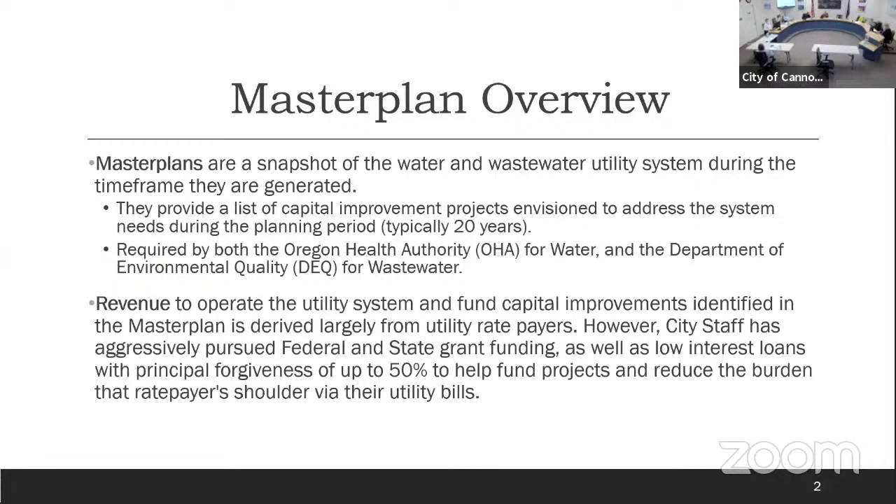Going to page 3, this is the SRAMP that was added just before we completed our master plans. The state added an additional requirement for all cities to have a SRAMP. This stands for Seismic Risk Assessment and Mitigation Plan, and it has to be part of your official master plan.

The city of Cannon Beach has been identified as a level X on the DOGAMI, Oregon plate number 7 for earthquake and tsunami damage. This is the highest risk category for damage in the state. This is because of our location.

We would become somewhat of an island in any kind of major catastrophic event. We have aging infrastructure. We are at a very low elevation, and it is identified that likely our infrastructure would be significantly compromised, if not catastrophically destroyed.

The 2013 Oregon Resilience Plan has set a 50-year planning goal for cities to attain the capability to restore critical services within a 1-week period after an earthquake or tsunami event, and to be able to restore all services within 3 to 6 months. It is recognized that services will be considerably more difficult for coastal communities to restore, and could take up to 3 or more years to restore complete services after a seismic event.

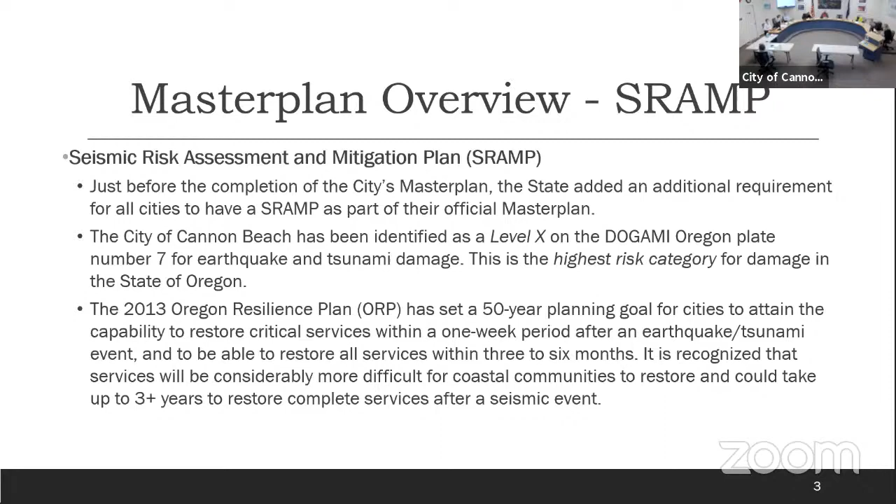The next page highlights the projects that were identified as a result of the SRAMP, and those will be addressed as I get more into the projects in the following pages. Anybody who would like details around the projects we speak about tonight, there are page numbers you can find when you go to our master plan. It'll tell you what page those projects are on, so it makes it easy for you to look in the master plan available to the public to get the nature behind the projects.

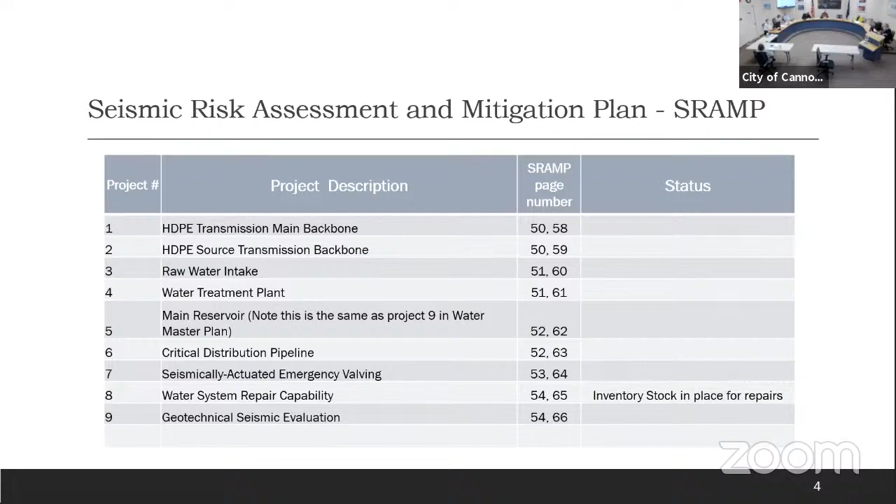You'll turn to page 5. This is just a project status of where we currently are.

If you recall, back on March 10th at the work session, Windsor Engineering came and gave you a presentation on our capital projects. They took a look at our entire master plan and gave another perspective of our capital projects, outlining the projects and the costs associated with them. That was our first pass at doing some vetting for the projects we felt we wanted to move forward.

We also made the decision, as we shared with you, to not change what's in the master plan, so that when we look backwards, we can tie the original master plan with where we are in the projects. Instead of making modifications, we felt it would be difficult to track from the original master plan. So from a water perspective, we have 34 total projects identified at approximately 17.3 million.

10 of those projects have been completed as of today, and we have one currently in motion, noted on the plan as the AMI upgrades. That's our meter module change-out that the water team is in the middle of right now. We're about 32% into that.

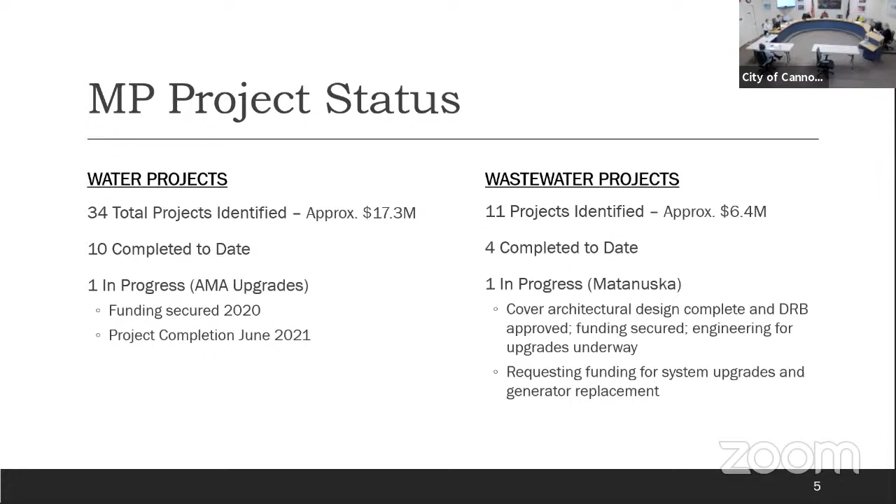The next slide gets into the path of the projects that concern this map. Phase 1 project proposed - you gave us money last year for this project. That's the $45,000 to evaluate the current main concrete tank site and consider a new location if the proposal for a new tank at that location cannot be achieved. The $45,000 you gave me will be used to study that and come back to council with information to help us make decisions concerning phase 3, which I'll get into in a minute.

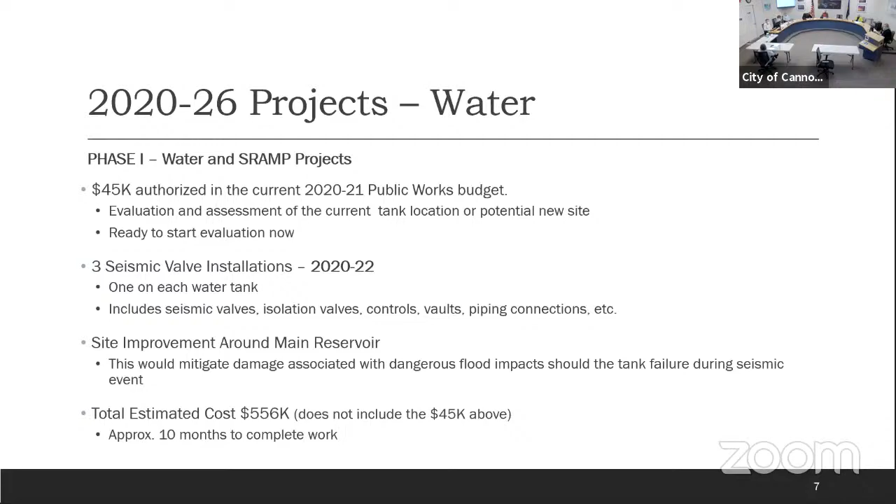And again, if the line between this side of town and across the bridge to that part of town were to be compromised, if we didn't have a seismic valve on that tank, then we wouldn't have water to the north end of town. Wouldn't be able to refill either. Correct.

The South Tolovana tank is fed from a pipe on the highway as well as our S-curve pipe that we put back in last year. That's our 1.6 million gallon steel tank. So we have some redundancy for that location, thanks to the S-curve project.

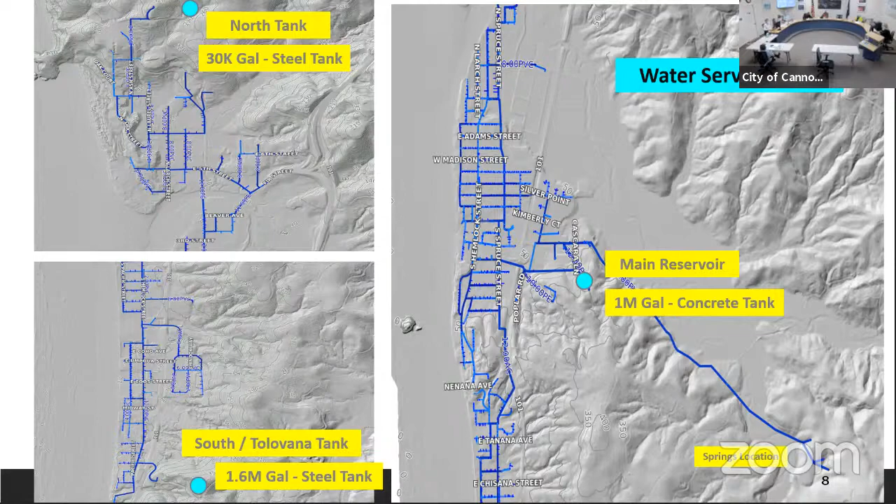Questions on any of the slides so far? Are you tracking with me on our locations there as far as our tanks and our lines? Okay, good. All right, so slide number 9.

Again, if any of these lines fail, we have no water to the city. This is different than some of our neighborhood lines, where we have isolation valves that we can use to isolate a situation, and there may be a neighborhood that doesn't have water.

With this route up here, the town doesn't have water, so the impact is much more significant. Existing pipes are anywhere from 50 to 70 years old, made of either old transite concrete asbestos pipe or old PVC pipe.

Our proposal in this project is to replace it with HDPE, high density polyethylene pipe. This is often used to replace aging concrete. This is the same pipe we put in at the Ash Street water project that a lot of you watched us install. It's a high pressure tolerant pipe with a high level of impermeability, often used to transport fluid and gas.

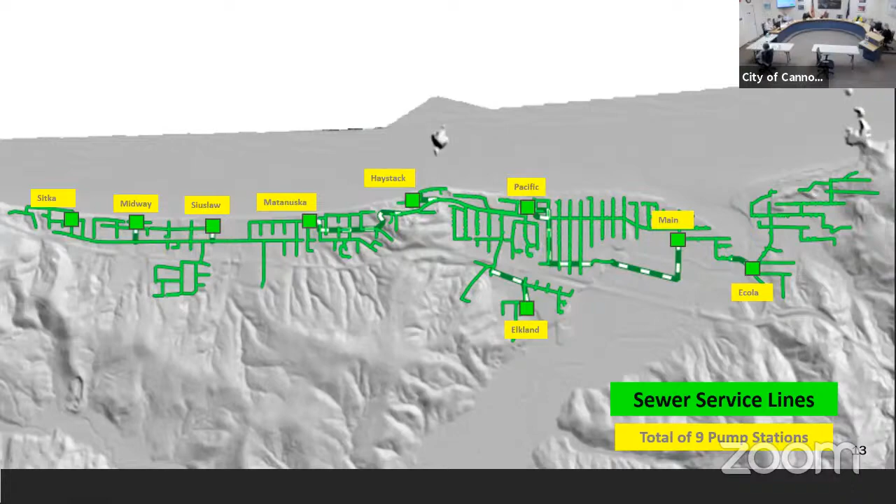Next, page 14. This is where I'm going to get into each of the wastewater projects and their nature. First up is the Matanuska pump station. As you recall, this is where we had our overflow last July. Without reliving that consequence, I'll just say that there are some improvements badly needed at that location.

Some of those improvements we've been able to make using our operations funds. We secured a loan last year for a cover, as I mentioned. The architectural design is complete and the DRB team has approved that. I've noted the reasons why it's important for us to get a cover over the top of those assets. The funding I'm requesting in this project is for upgrades of the control panel, which was part of our issue with the overflow, and the generator. Our generator is rusting, sitting there in place, and it's important that we do this before we get the cover on it. I need to replace that generator before I cover the building.

The engineering for the upgrades is currently underway. I managed to do that in this year's budget. I'm also chasing FEMA grant money for 4 generators, one being this Matanuska generator. The cost of this project is $260,000, which includes the generator and the panel upgrades. Our current technology at this location is over 30 years old.

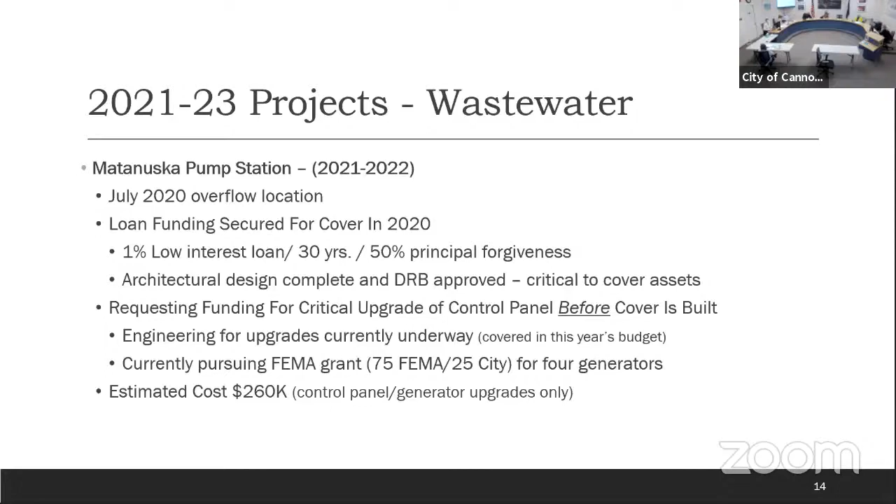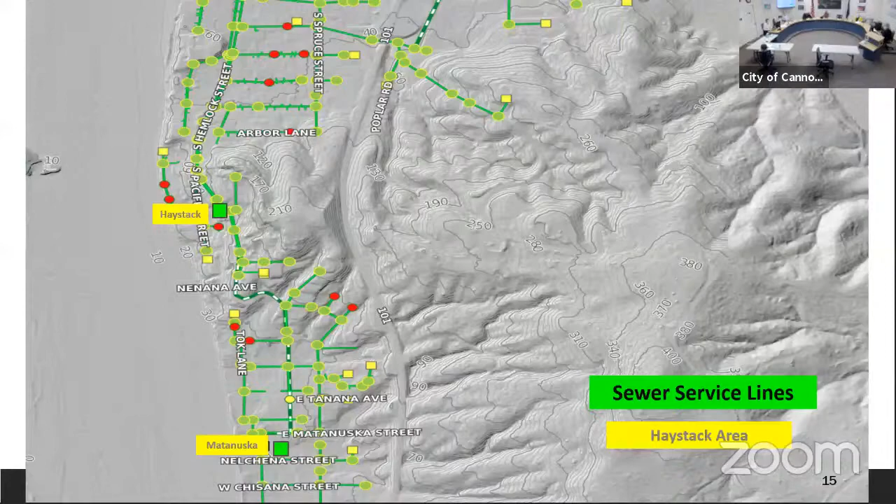Next, slide 15 is going to talk about the Haystack pump station. This shows you the location of Haystack. If you'll go to slide 16 - Haystack Pump Station is the only pump station located on private property. If you remember, you gave me budget money last year to actually put a permanent generator at this site. That project was delayed because the homeowner was in the middle of trying to sell his home, so he asked us to please not do the project. We pulled the project back and revamped what we would do going forward to address the major maintenance upgrades that are badly needed.

Also, during that process, we discovered that we had no easement in place for the neighboring property, which we're required to access in order to do this project. So we had to get that easement put in place, and I'm happy to say we were successful in getting that.

The upgrades planned are not only the control panel, but we have 100 feet of force main and 200 feet of gravity line to put in there. The timing for this project is critical because of its location. Obviously, it's located on Pacific, which is near a beach access point, but it's a very narrow street. We've had to modify some of the parking down in that area simply because of emergency access for the beach access and for us being able to get down to this pump station without so many cars on both sides of the street. We can't get a generator down there, or a Vactor truck, or whatever we happen to need.

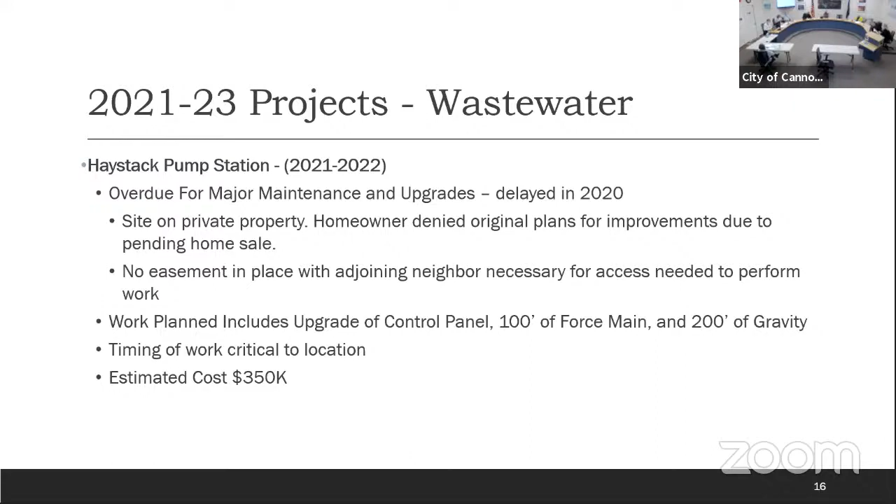The next page, page 17, highlights the location of Midway and Siuslaw, which I'll talk about next. The Siuslaw location is just to the side of the Tolovana Inn, and Midway is just south of that on Pacific.

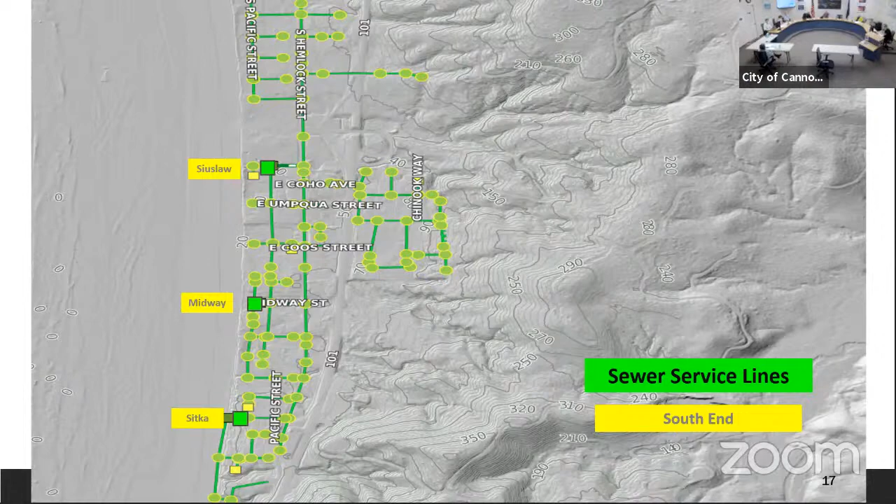Page 18 highlights a little deeper what this is about. These are 2 of our last 4 pump stations that require us to manually roll out a generator. So putting permanent generators here does exactly what I mentioned earlier.

It saves us time and response time in being able to get out when there's been a failure. In the event of weather, the generator automatically kicks on and it doesn't take one of our technicians to be out there to do that. They still would respond to the site, but when the generator kicks over and we get an alarm that it's kicked on, they have SCADA. They can look at what's going on.

They have some control of what they can do remotely, and then they're responding at the same time. They can do that via a tablet or a laptop. It also saves us overtime and having the guys out in the middle of the night rolling a generator out when the winds are 60 miles an hour and it's raining sideways. We try to get in front of the weather and get these generators out in advance, but it's not unusual for us to have something occur that causes us to have to pull them out in the middle of the night unplanned.

Both of the locations require building extensions in order to put the permanent generators at that location. I'm asking for engineering funds to be able to engineer these projects this budget year. Both of those pump stations can be engineered for $40,000. Construction would occur the following year, in the 22-23 timeframe.

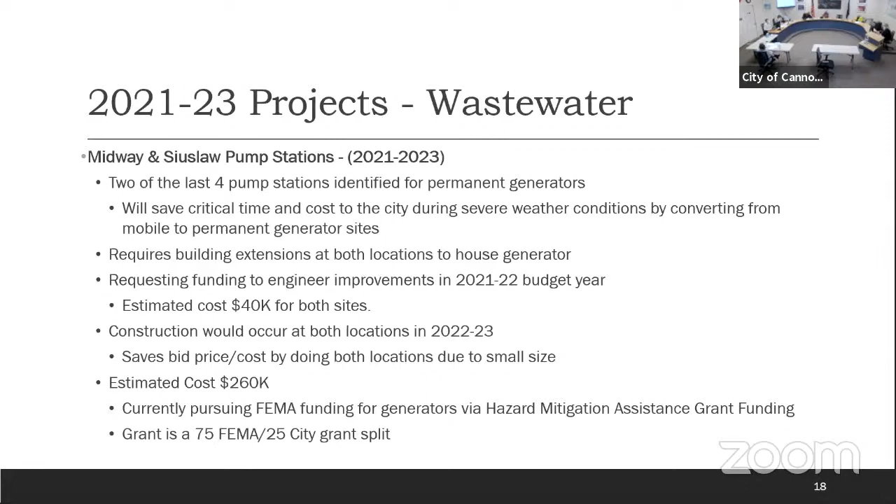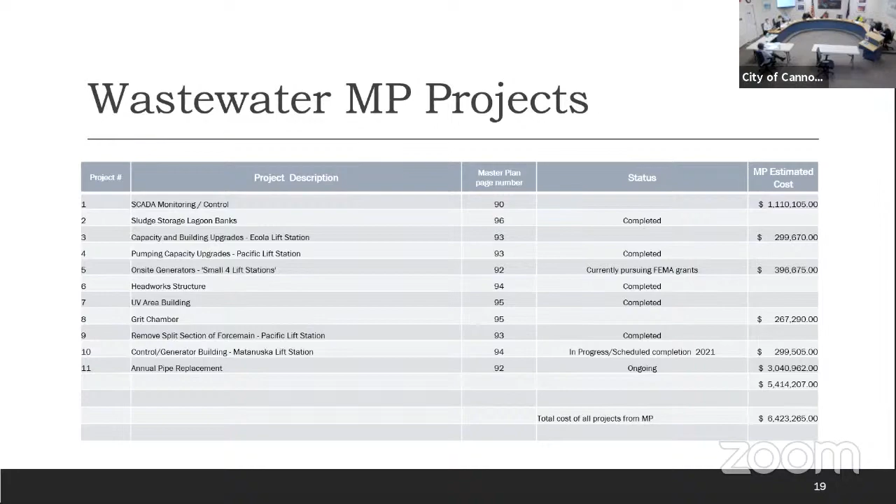Behind that slide is the wastewater master plan projects that remain. Then I'll take you to my closing slide, which is slide 20. Again, the projects that we brought to you tonight are projects that the staff feels will address the most critical needs for this budget year and the years beyond. We've spread it over...

2021 through 2026. Obviously, we've been aggressive about chasing additional funding, federal and state grants, to try to offset the burden of the ratepayers. The federal money that we're chasing, the infrastructure funds that Bruce is talking about, is above and beyond what I'm already chasing. It's also federal funding, but it hasn't been released to us yet. We have to get an invite letter saying the money is available for us to chase. So that money is still an option for us.

By giving me the engineering money that I'm asking for, these projects are put in a shovel-ready condition, where I could not only move forward with what you give me from a budget perspective and or our rates, but if that money comes in, I could still pursue those funds, and then we don't have to spend the budget money to do that. We've done that on other projects. We basically pay ourselves that and release the money back to the general fund. And that's it. Questions?

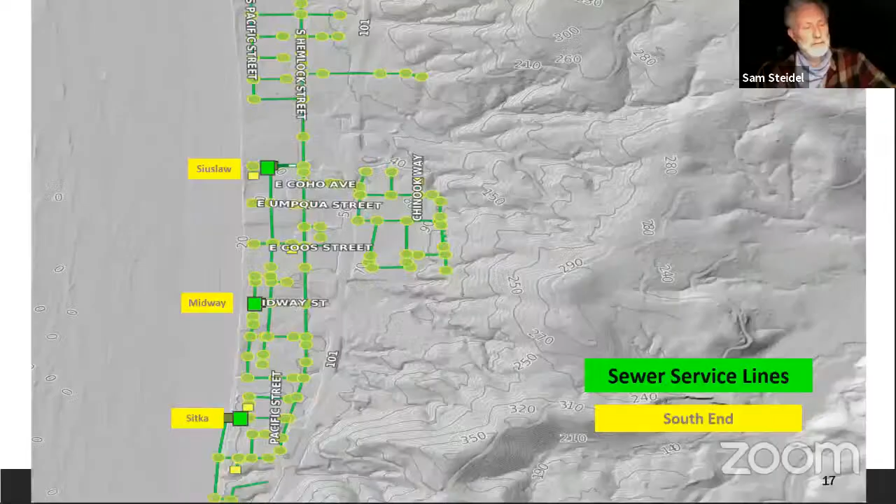I have one question. It's kind of project oriented, but it's one of the long range phase 3 projects. I'm just curious about the resiliency aspect of the 101 water line. There's a stretch there that is impossible to do resiliency on, and I suppose this would come once the engineers have a chance to look at it, but I just want to make sure they do.

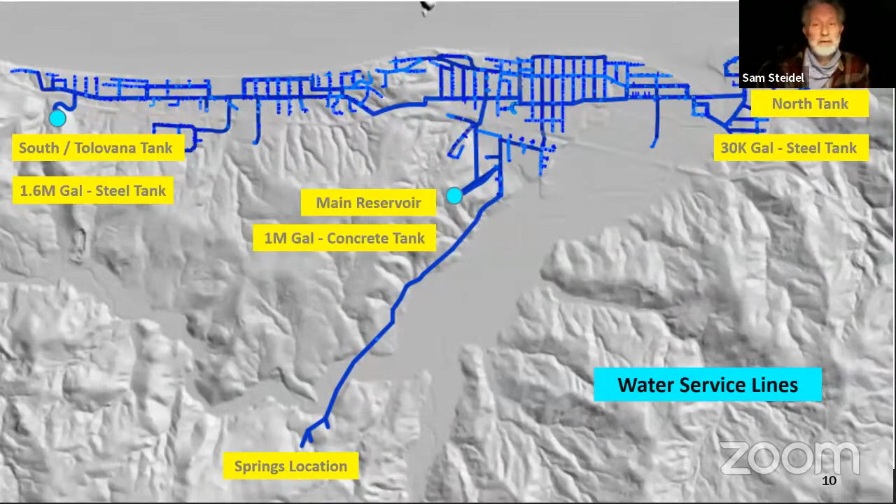And what stretch are you talking about? A 101 bridge primarily, but also that entire length. That's a washout area, and it would be impossible to create any sort of water line on the bridge area that's not going to wash out.

He's talking about crossing the bridge. Yeah, Sam, I know, dealt with this before when you're dealing with passes. In areas like that, if it looks like it would be a problem, you can do a subaqueous crossing, and a lot of times it's actually an easier project to do. So it would be possible to do those. I think we have a subaqueous crossing now under the First Street Bridge - the pipe is not connected to the bridge and it's not laying on the bottom of the estuary. I don't know how deep it is, but it is actually under it. So I think we could do a subaqueous crossing there.

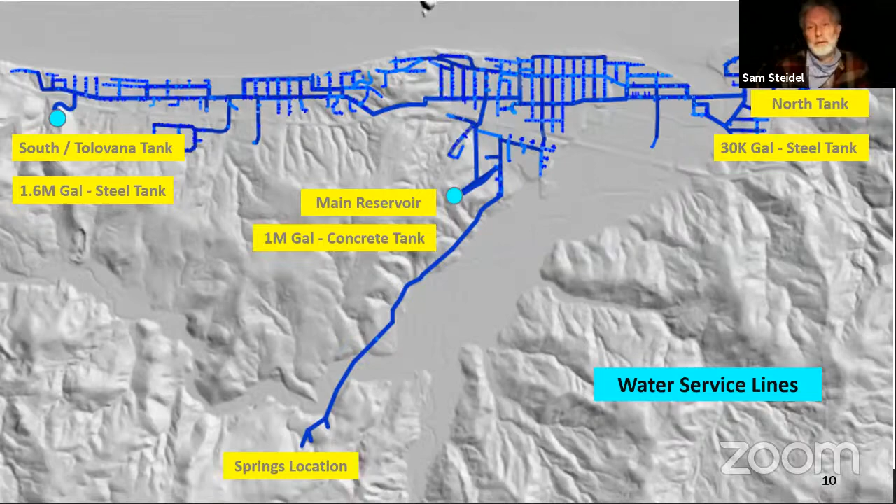Well, that's what I'm asking, just to make sure the engineers look at all the possibilities. Another thing I've heard is to make sure you have intersections on either side of the bridge that make it really easy to repair. That's another way to do it. So, just a question for project 23, it looks like. Yeah, I think some sort of a directional bore in those areas would make the most sense.

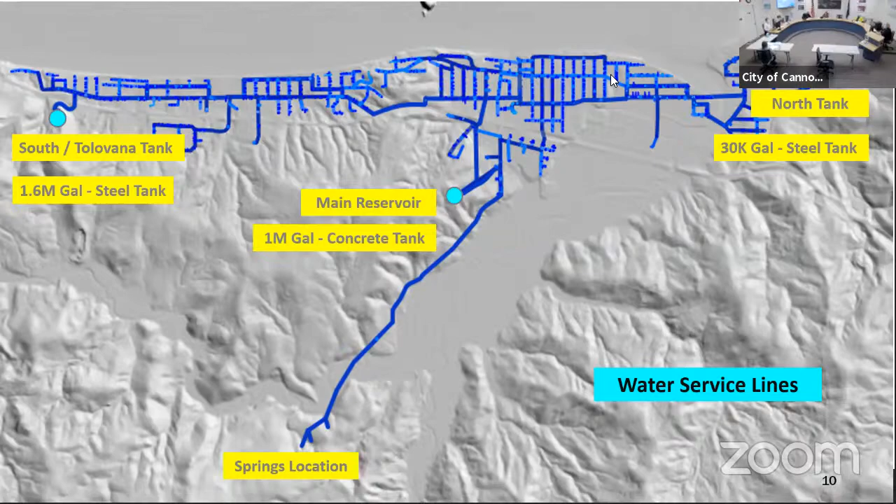Okay, and also, Karen, talk about the new pipe. It's much more flexible, the HDPE. Yeah, the HDPE, talked a little bit about that - let's see here, take you back to slide 9. So the HDPE, as I mentioned, is the high-density polyethylene pipe. It's what we used up at the Ash Street water line replacement.

This pipe some people call a flex pipe because it can tolerate the movement of the ground and/or shaking, if you will, of an earthquake. And it doesn't have the response of breaking like some of our other pipes, obviously the concrete pipe, but even PVC. PVC is a vinyl polymer product, and the HDPE is actually a thermoplastic, made out of petroleum. So that's where you're getting your movement tolerance in this pipe.

There's been extensive research on this pipe. It's a pipe that my predecessor said he's seen used in a lot of major cities, especially in the southern area where you get a lot of earthquakes, because it's been proven to be much more flex tolerant. The joints are fused, not like our current pipe joints with pieces - there's a machine that fuses it together, so it's like one solid piece of pipe, giving it greater strength. You don't have joints that could be compromised.

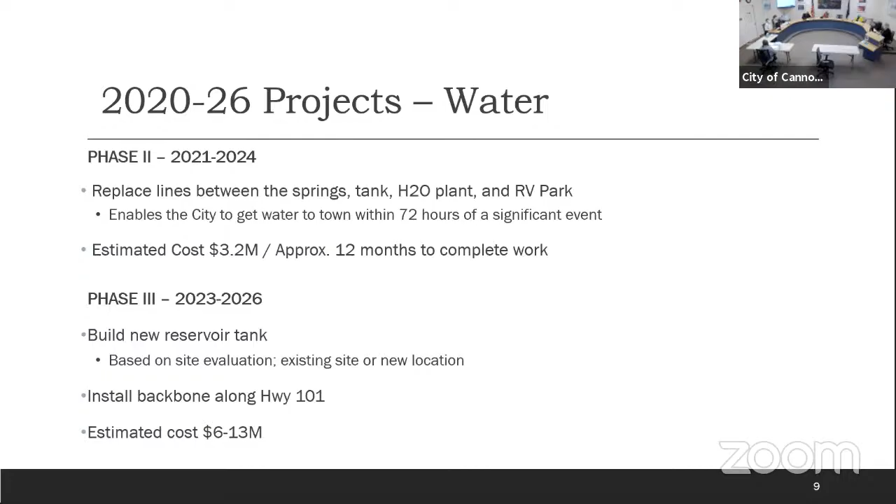Okay, ready to get into the funding? Yep, go ahead. All right, Ms. Laura, you're up. Evening, Mr. Mayor, councilors.

Okay, we're going to discuss water utility first. Slide 2, so just showing where we're going to be headed this evening. Talk a little bit about what our rates are now and where we could potentially be going. Talk about the baseline and model assumptions used in this rate analysis, and then we'll look at the actual rate projections that came out of that.

Slide 3. So some history, our last water rate increase was March 2018, almost 3 years ago. We raised the rate to $24.20 from $17.94, a 35% increase - $6.26 additional each month at current rate. $24.20 is the base rate for a 3/4 inch meter, and we have a rate of $6.05 per 100 cubic feet over an allowance of 400. Again, that's a residential 3/4 inch rate.

So maybe if we move to the next slide, we can see how that works out. What does the utility rate model do? If we have the baseline revenues of 1.3 million, we add the personnel costs, the materials and services costs, and we get the total baseline. Then we add inflation and debt service to that, and we get the total revenue requirement each year, beginning in 2022.

Once we know the revenue requirement, we go back to the utility rate model and derive the new base rate requirement for each year, because we put the revenue required in there, and we keep ratcheting up the rate till we get that revenue amount. So it tells us what it is we need.

Okay, slide 7. Is everyone kind of with me so far? Well, your assumptions say the baseline requirements do not include any debt, but on your previous page it says plus debt service. Okay, back to slide 6. Yeah, my baseline is the revenues, personnel, materials, and that makes my total baseline. That's what we need to run operation.

Slide 9. The annual debt service costs for phase 1, 2, and 3 are estimated as follows. Phase 1 will be $21,550 per year, and those payments start in 2023. So when you look at the rate projection toward the end of this report, you'll see a little bump in the revenue requirement - we need a little bit more that year than we did in the prior year, just because those payments go online at that time.

And then they start to even out, and after a while we don't need to raise revenue at all to cover debt unless we're adding new debt. But if we just stick with the debt we have here, you don't need to keep increasing because it's already built into the rate. Phase 2 projects are $124,000 per year, starting 2025, and the final phase 3 debt service is $232,500 per year, with the first payment starting in 2027.

Obviously, contingency increases each time expenditures increase. That creates another bump too. So the more expenditures you have, the more contingency you'll have, based on that 20%.

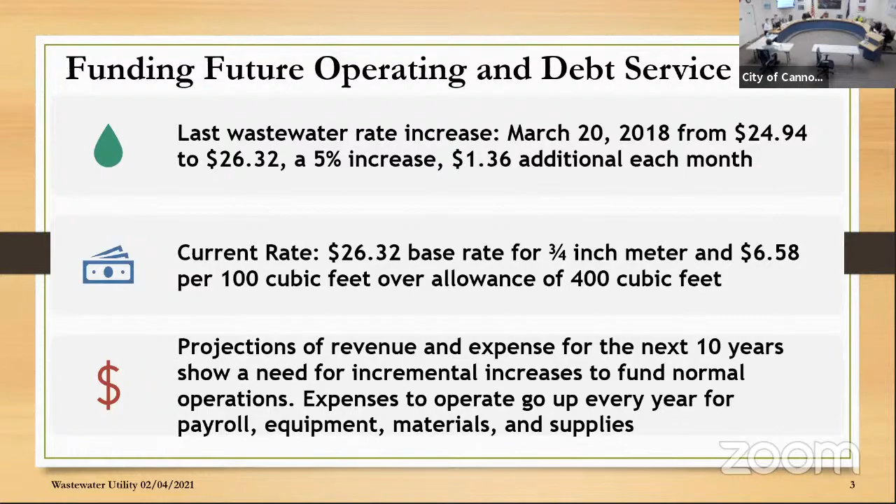Get some of these projects funded, and we think rate increases are the way to do that. Slide 5.

Same modeling approach again. I was able to get the sewer rates because that model wasn't meant to handle the sewer rates, but I went in and put all the rates in and changed all the data to make the Excel spreadsheet work for sewer as well. So that was a handy thing to do. And I was able to come up with the same baseline data that I have for water.

When we put our baseline revenues or baseline expenses in this case scenario, we needed to generate more revenue than we're currently getting from the utility rate model, using the non-COVID months of consumption. So we had to earn more money than we're making now, to the water fund, which I think will come in at 1.3. We're not going to raise 1.6 million like this year. So what we had to do is get additional revenues right from the get-go in 2022 from operations, and you'll see that in the rate projection when we get there. There's a big increase just for operations because we're not raising the amount of money based on the projected baseline expenses.

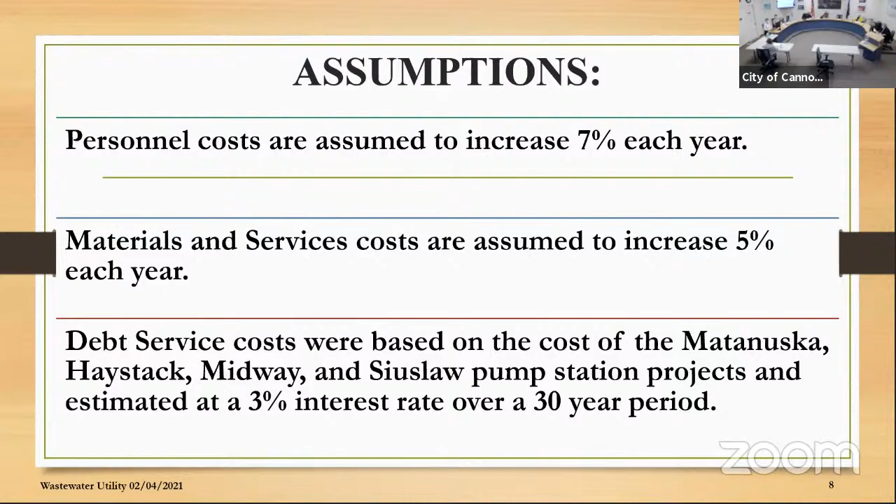I have a question. Why is this estimated at 3% interest over 30 years rather than 1%? Are they not eligible for the same grant? Yeah, but we never know when that 1% is going to end. The loans go anywhere from 1% to 3%, and the 3% can be extended to 40 years instead of 30, but the ones I've been chasing are the 1% as long as they exist. They may no longer be available to us. So this is possibly a 1%, but more could be a 3%. So you're just going more conservative.

Yeah, if you guys were to allow this, then we know the ones we're chasing right now qualify for that 1%. But by the time I take these forward, if the 1% is no longer being offered, most likely I'd have to chase a 3%.

Karen? Are we not applying through DEQ for those? Are we applying through DEQ? Yes, it's a different loan source, for the water and the wastewater. They have different interest rate structures. What we do is we get a letter of invite letting us know what they're offering to us, and we send in a letter of intent saying what we're going to be pursuing. Right now the interest rate is 3 times higher than what we can get for water projects, and a lot of it depends on the qualifiers these projects hit that tell you if you qualify for the 1% or the 3%.

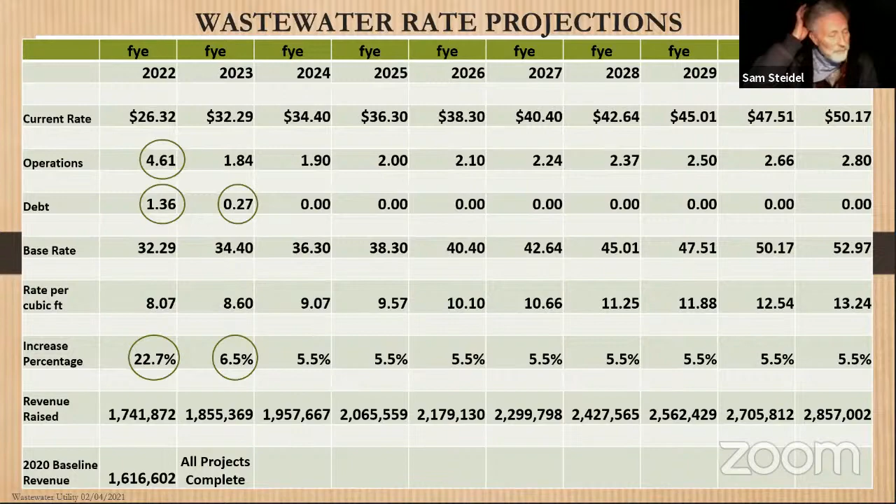It's kind of the basis of the comment that I sent to council about my concern regarding the fact that we have a proposed plan in place here with some great projects that Karen's been chasing her magic money on. And when we looked at Lori's numbers for water, we got to, I think it was 2027 or 2028, where we didn't see any more additional debt service payments being needed. However, there are still a lot of water master plan projects, a lot of dollars worth of water master plan projects that haven't really been factored into this particular analysis.

And that's kind of where my concern comes. The one that I sent to you is like, how do we handle that? Because really you're talking about, there's going to probably be additional projects that have to go on top of this. So you're talking about even a larger escalation in rates.

And I think perhaps looking at maybe a different option, at least considering that we're possibly... Like, I'm totally behind phase 1 and phase 2. I think those totally make sense. But because that gets you water within 72 hours, you know, in the event of a catastrophic event or a non-catastrophic event, any type of event.

But should there be at that point a balance between working on projects that are in the master plan, working on the lines that are in town that are aged and will continue to age during this time frame? Are we compromising some sort of replacement plan for those lines while we're going for the tank replacement and the line on 101? I think that's something council needs to think about—if there's value in considering that approach, as opposed to just going for all the resiliency items first, and then, I don't want to say as an afterthought, but afterwards going for maintaining the infrastructure we already have in the ground.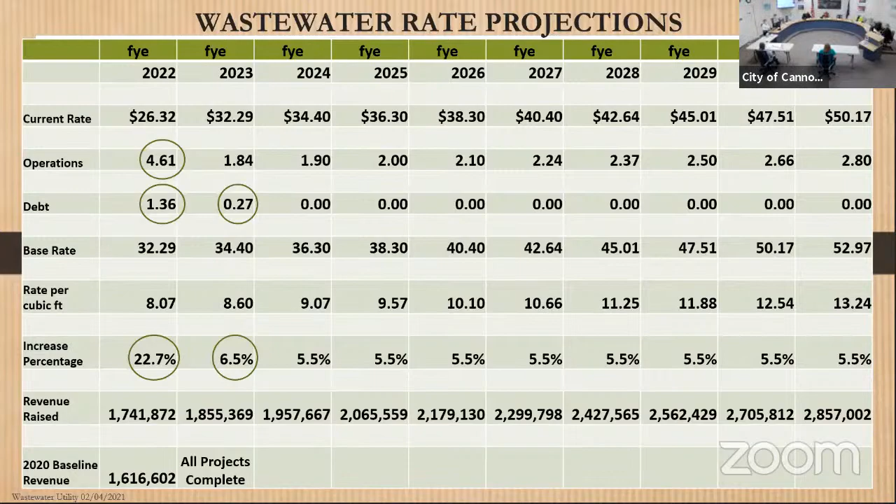Go ahead. That slows my computer way down.

I think what would help staff is if council said, for this dollar amount, we understand the value and we're willing to move forward. You can say yes as you apply, but it's going to be based on budget timing and priorities. The big question is, do we think this is of enough value to the city that we'd need to increase costs to the people who live here? We can always modify the project list or push some things out, but the question is: are we even in the ballpark for doing this kind of work?

Oh, I think it's been great work done. Starting with 2015, we started this whole thing of looking at master plans. It took 2 years of really serious analysis. So I think we ought to go.

If you want to live here and have these services and be comfortable, safe, and healthy, this is what it's going to cost. We talk about using the TLT portion of the general fund. One reason we didn't have to raise rates for a long time is we used those monies from the general fund to keep the water and sewer systems going. We're still doing that. So we're in a new phase now. We've got to face the future.